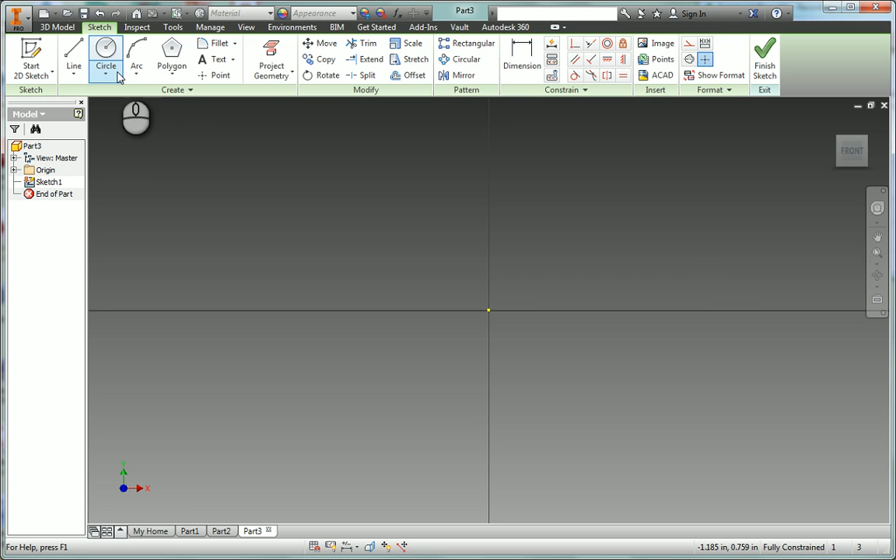In this movie, I'd like to show you how to use the pretty valuable offset tool. So we're just going to start here and just kind of play around. We're going to start a new sketch. And let's go ahead and let's make a rectangle.

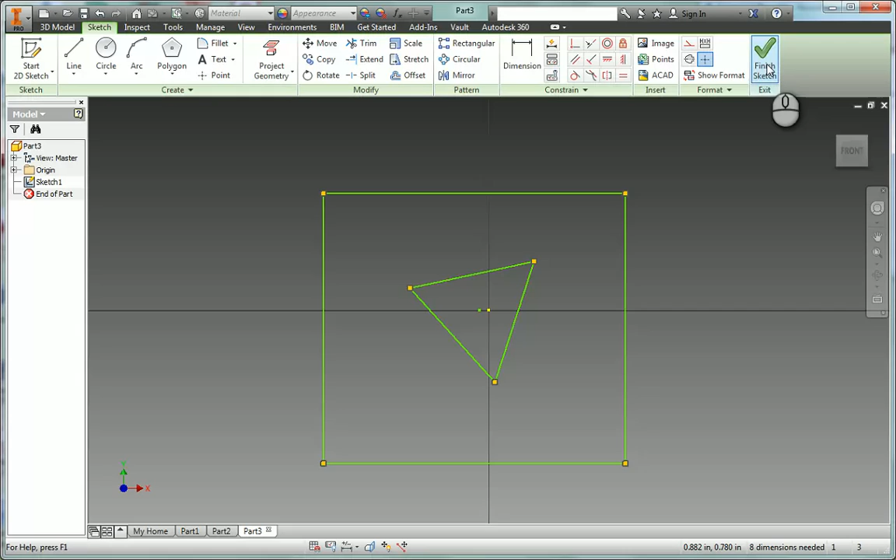And let's put a triangle in here somewhere, like so. Okay, and let's finish the sketch. Let's extrude. Something like that. Okay. Let's turn on some shadows here.

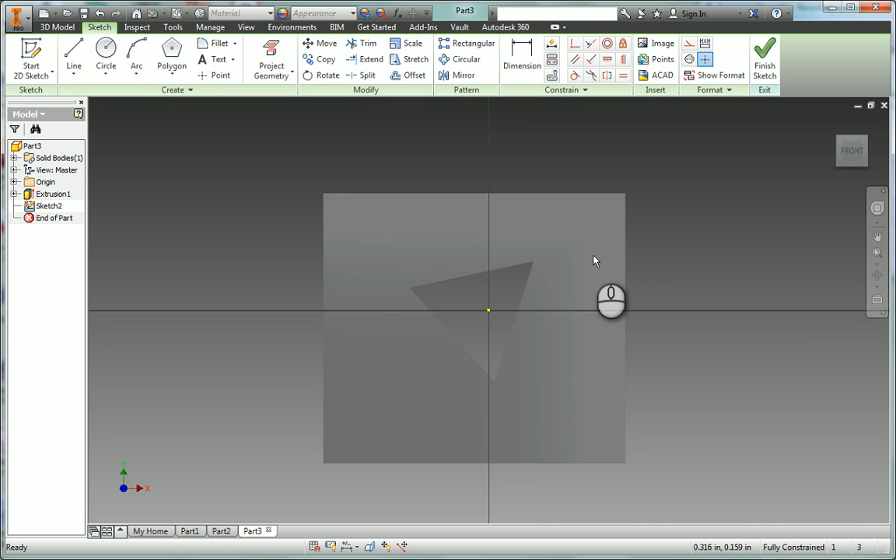All right. Okay, so what we're going to do here is we're going to start a new sketch on one of these faces. And so what we want to do is, maybe instead of shelling this part out, I'd like to kind of shell it out on both sides and have like a middle wall.

So one way to do that is I'm going to project the geometry of this whole part here. So now I have these yellow lines on my plane that I just drew. And I can click offset, and I can click one of these enclosed loops here, and I can offset a shape however far I want to.

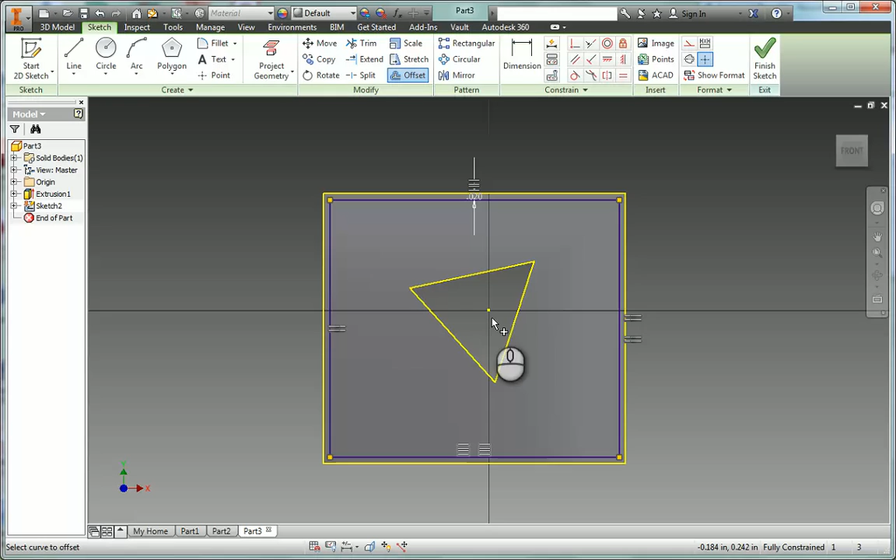I'm just going to go in like 0.02. And now I have that offset. I could click offset again and do the triangle also, and I could do 0.02 or something like that. And then what I can do is I could finish that sketch.

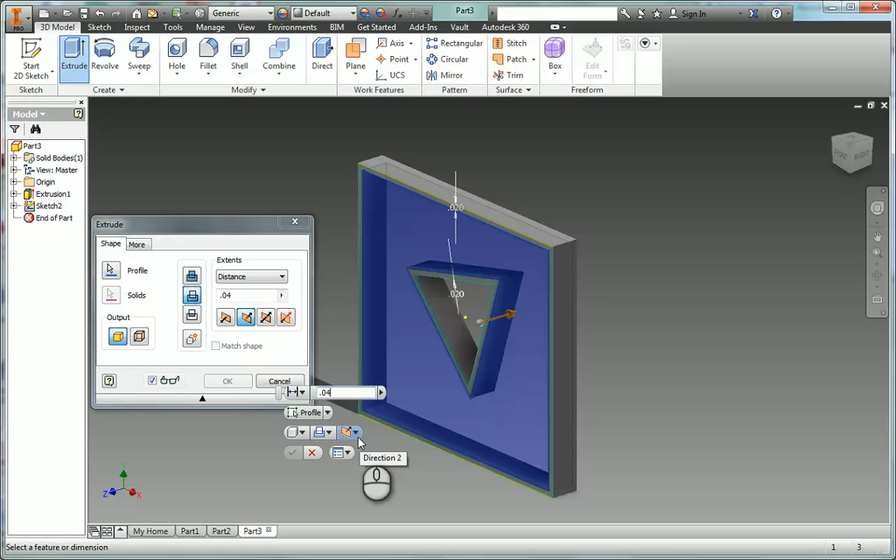I could extrude that middle section. I can cut it backwards, and we'll go like 0.04. And so I have that kind of somewhat shelled in there.

And so what I could do then is I could actually go on the other side and pretty much do the same thing. So I could start a sketch on this side. I could click project geometry, get my yellow lines on there, offset, grab this square, bring it in 0.02,

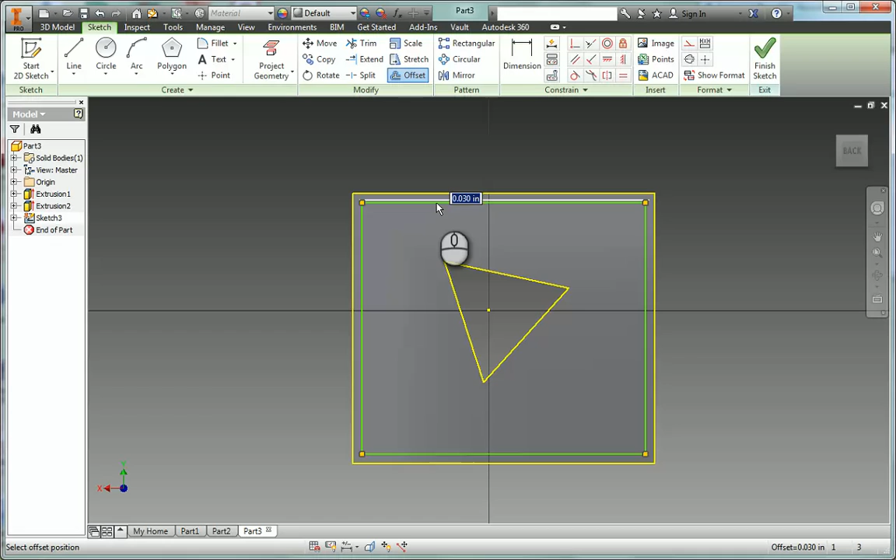and then I could offset this triangle, bring it out 0.02, and finish sketch there, and then extrude that section. I could cut it in again, 0.04 is good. And then, so what I've done is I've kind of shelled it inwards on both sides.

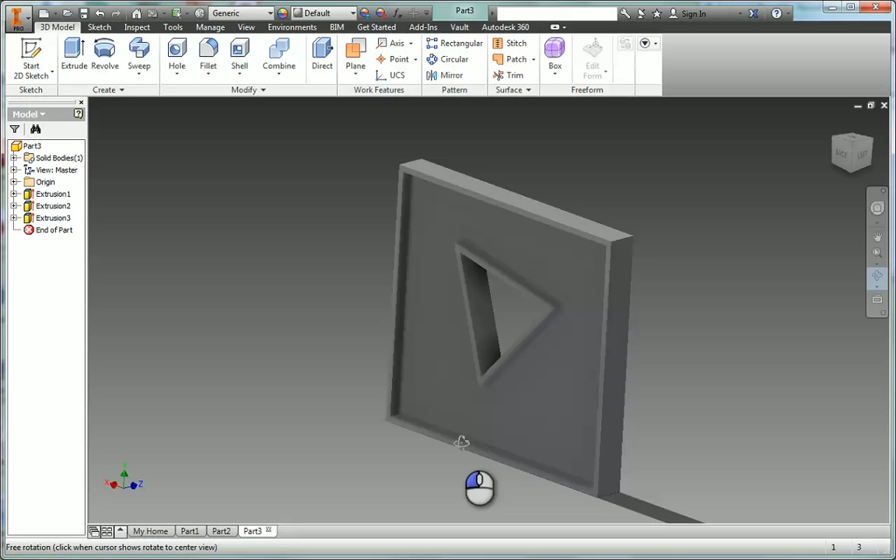So that offset tool is pretty valuable. If you need the same shape and just offset it a little bit from what the original thing is, that offset tool is the thing you need to use. I think it'll help out, hopefully.